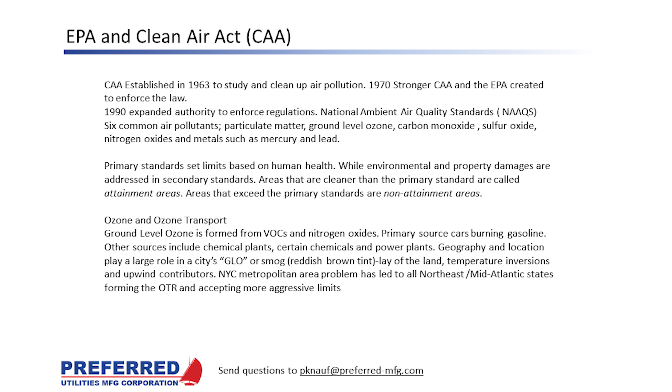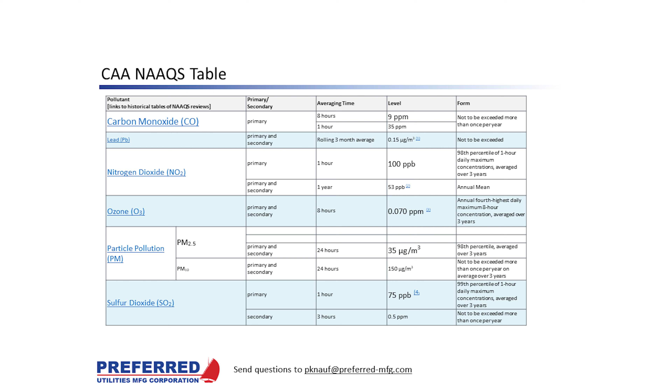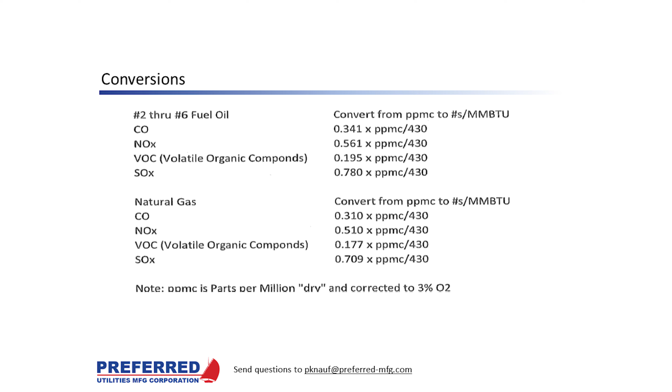If you ever notice a spec or documentation, quite often it's expressed in pounds per million BTU. This is the way you convert from parts per million to pounds per million BTUs for the various fuels, as well as for the pollutants we're going to be talking about today. This is a handy chart to print out and save.

Surveys show that the public perception is we are emitting more today and air is getting much worse. Despite this overwhelming perception, the U.S. is doing quite well, and actually the developing nations are contributing to most of the world's pollution.

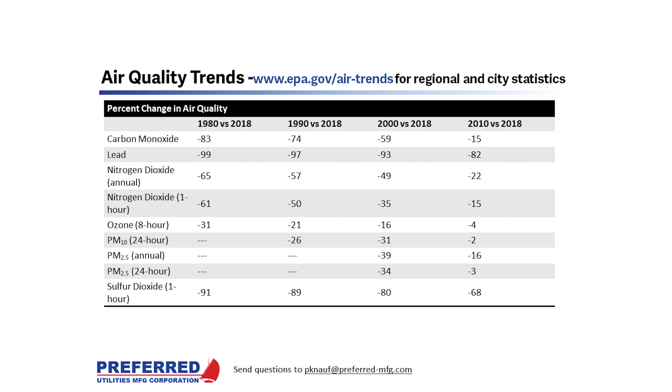As you can see in this table, the EPA is tracking air quality from 1980 to 2018. Carbon monoxide emissions have gone down by 83% in those 38 years. Lead is down by 99%, primarily through taking lead out of car fuel, gasoline. Nitrogen dioxide is down by 65%. Ozone is down by 31%. They didn't collect particulate matter data back then, not until 2000. And sulfur dioxide emissions are down by 91%.

Here's another way to look at it, a nice, easier to look at graph, where the center line of the x-axis is the most recent national standard. As you can see, all the various pollutants are tracking down, and most of them are considerably below the national standard.

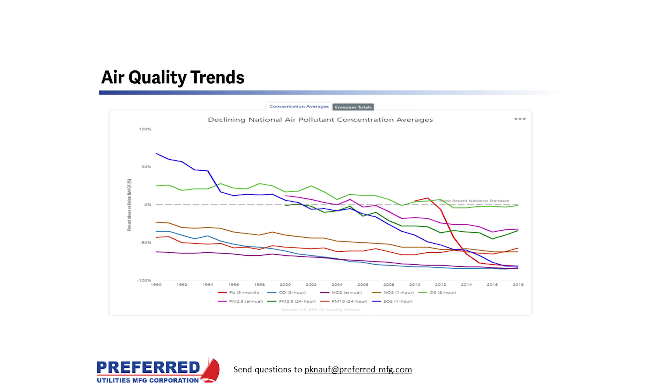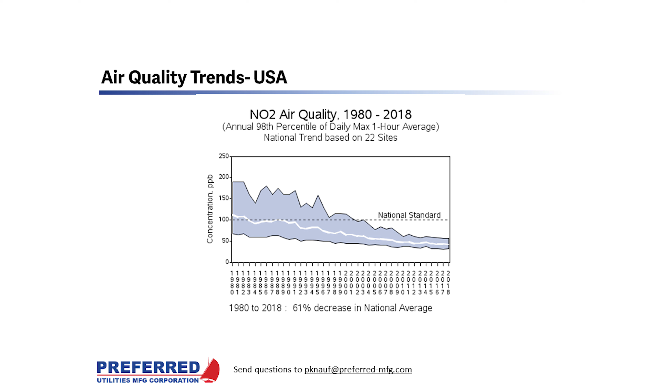The U.S. NO2 air quality from 1980 to 2018 - as you can see, we're above what is now the national standard of 100 early on, but about the early 2000s we dropped below that standard, and today we're quite a bit below that. That's measured as daily max 1 hour averages.

Since most of us are in the Northeast, this is a graph showing the Northeast emissions from 2000 to 2018, the same daily max 1 hour average. So that's a 34% decrease in the regional average.

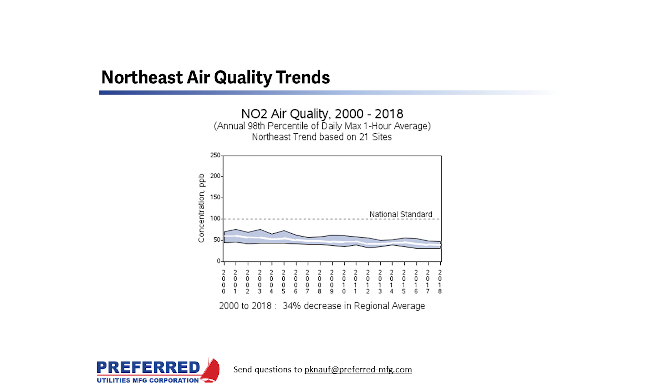There are three main ways to reduce emissions: pre-combustion choices, combustion methods, and post-combustion methods. We're going to discuss those separately.

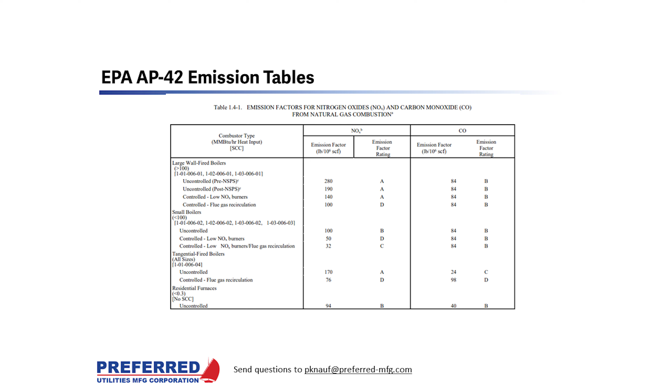Now, most of these statistics you're going to see are going to be corrected to 3% oxygen. So it's very important that you do that, since not very many installations are right at 3%. When you look at the raw data, you must always correct it to 3% oxygen.

David, is that wet or dry oxygen? It really doesn't matter - if you're measuring NOx wet, you would use your wet O2. If you're measuring NOx dry, you would use your dry O2. As long as you're consistent, the formula works.

It is important to note that combustion has pass-through components. Pollution from sulfur, lead, mercury, and particulate matter are not influenced by combustion technology - they're in the fuel and pass through the combustion process.

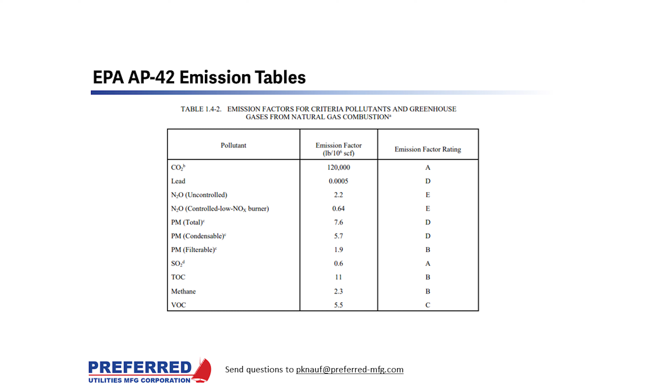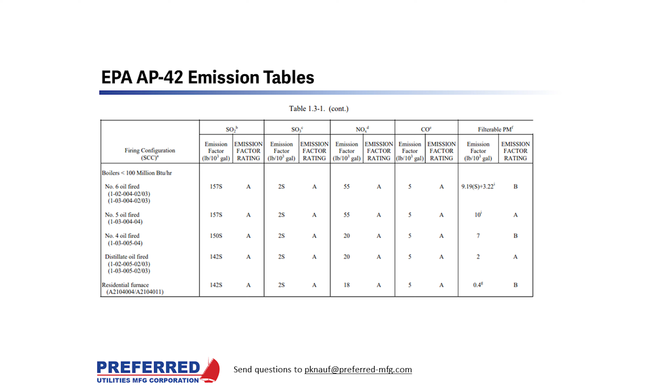Table 1.3.1 shows various fuel oil emissions, expected emissions for SOx, NOx, and CO for different size types of fuel oils. It's important to see the differences from residential furnace emissions, as well as the previous slide's natural gas emissions. So far, we've discussed pre-combustion techniques to reduce emissions, mainly fuel selection.

Next we'll talk about operational changes, but I want to take this time to point out the EPA website and the wealth of information available there. Earlier you saw air trends that came right off the EPA website, and recently we saw statistics on fuel characteristics. All this and more is available at epa.gov.

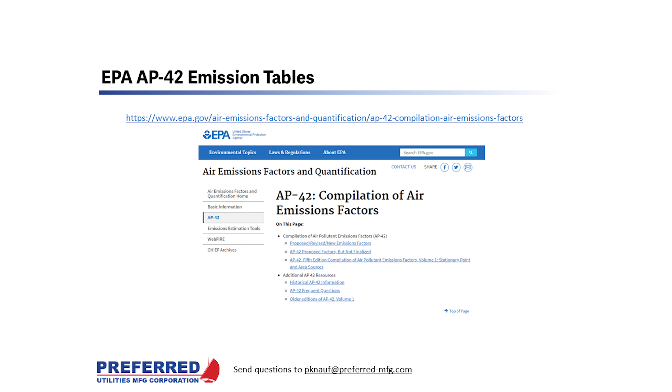So next we're going to start talking about operational changes to reduce emissions. Obviously things like good boiler tuning and lean excess air can improve performance and efficiency in any operation. But mainly we'll be discussing the reduction of pollutants that are not pass-through pollutants, by optimizing combustion and efficiency through improving the combustion process.

Focusing on NOx emissions: NOx is usually 97% nitric oxide and 3% nitrogen dioxide, but it is formed in three distinct ways — fuel NOx, thermal NOx, and prompt NOx. Fuel NOx is oxidation of the nitrogen molecules attached to the hydrocarbon chains inside the fuel. Thermal NOx is NOx formed by dissociating nitrogen molecules in the air that join with the oxygen in the air to form nitric oxide.

So two distinct different areas and sources for the nitrogen. And finally, prompt NOx, which is formed from the rapid reaction of atmospheric nitrogen with hydrocarbon radicals.

Now I wanted to insert here where we've seen pollutants characterized in a few different engineering units. When you see pollutants characterized as parts per million, it's important to correct for the oxygen level in the stack, because it influences the statistics. You take the formula shown here: actual NOx times (20.9 minus 3) divided by (20.9 minus your actual measured oxygen). This works for CO as well as any of the other stack pollutants.

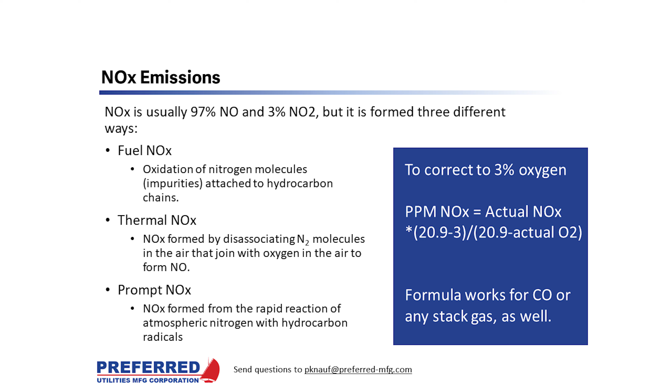Fuel NOx reduction addresses oxidation of the fuel-bound nitrogen molecules attached to the hydrocarbon chains. For single burner boilers, the only way to do it is by burning cleaner fuels. Multiple burner boilers, larger boilers, can use fuel staging techniques to reduce NOx. The strategy is to convert the hydrocarbon fuel to carbon monoxide in a sub-stoichiometric or fuel-rich environment, then convert the CO to CO2 and water vapor in a high excess air environment.

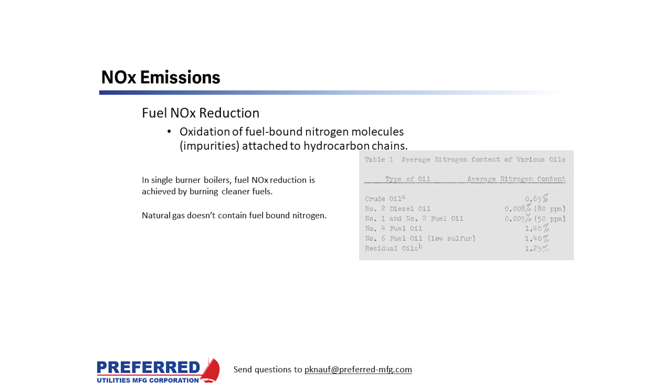This can be done in utility boilers through burner tuning, over-fire air ports, and putting some burners out of service. Obviously these methods are not available in a single burner boiler or furnace, and the only way to achieve that is by changing the fuel.

Thermal NOx reduction: the dissociation of nitrogen molecules in combustion air follows an Arrhenius relationship, meaning the percentage of nitrogen molecules broken into nitrogen ions has a logarithmic relationship to temperature. So to reduce thermal NOx, combustion engineers reduce the peak temperature of the flame.

This is done with burner fuel and air staging to slow combustion, and flue gas recirculation that spreads the enthalpy of combustion over a higher mass flow and lowers the oxygen content at the flame, so more nitrogen radicals reform with other nitrogen radicals to make diatomic nitrogen again. Reducing the concentration of oxygen in the combustion zone, increasing the concentration of nitrogen, reducing the peak combustion temperature, and reducing the time the combustion gases remain at elevated temperature will all reduce thermal NOx formation.

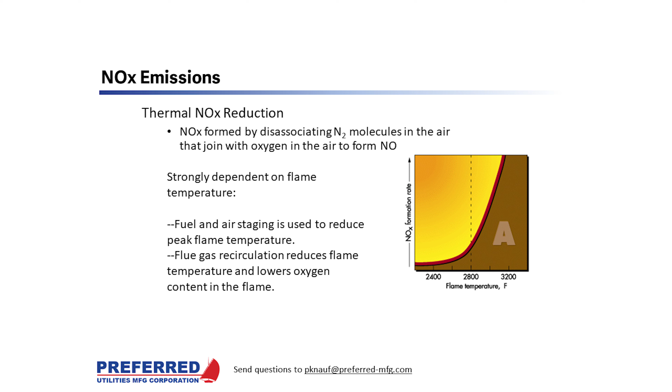FIR is a NOx reduction technique applicable to boilers that burn gaseous fuels only. It's similar to FGR, except that a portion of the flue gas is mixed with the fuel instead of the combustion air. This technique has several advantages: it lowers the peak flame temperature, reduces the oxygen concentration in the combustion zone, improves the fuel-air mixing, and reduces the time under NOx formation conditions.

When the same volume of flue gas is used, FIR can be more effective at reducing NOx than FGR. To minimize possible confusion, caution should be exercised when the acronym FIR is encountered, because it's used to represent both fuel-induced recirculation and forced internal recirculation.

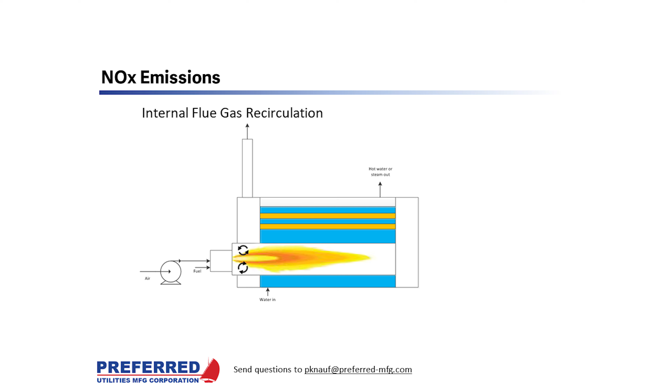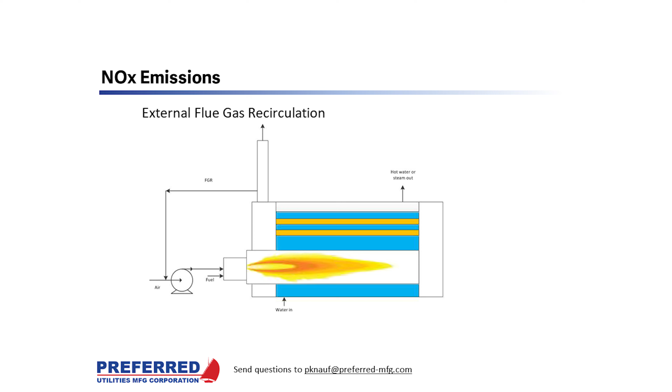This schematic shows external flue gas recirculation, which accomplishes the same thing by reducing the combustion temperature. It's the external feeding of flue gas from the stack or the last pass of the boiler back into the combustion air, where it mixes in the fan or wind box and is reintroduced into the furnace. It's very effective against thermal NOx formation, but this technology is a little older, going back to the 1980s.

Prompt NOx: the most effective NOx emission control strategy is one in which NOx formation is reduced as much as possible while boiler performance is affected as little as possible, except in advanced burner concepts where air and fuel are premixed. Combustion at either low or very high excess air levels results in low NOx formation. For most low NOx boilers, the best combination of low NOx formation and high boiler efficiency occurs when the amount of oxygen is just enough to ensure complete combustion.

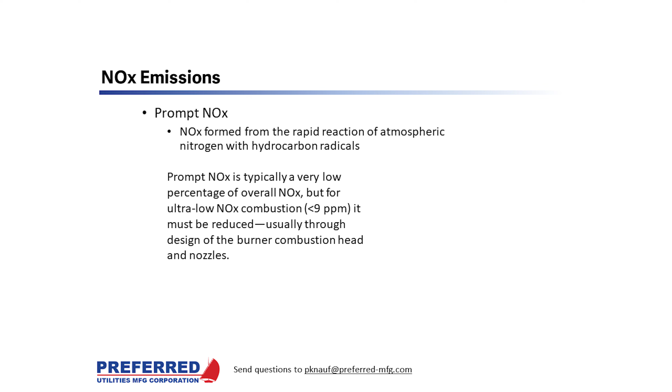Operation at very low excess air levels can cause problems. It can result in incomplete combustion and the formation of CO that causes boiler efficiency to decrease. In addition, it can create unsafe conditions inside the boiler that can lead to an explosion.

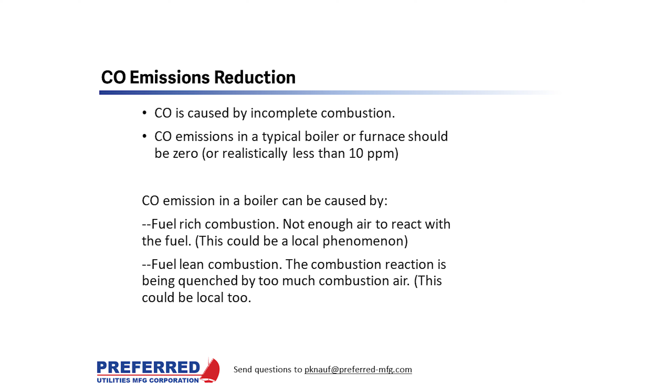CO emissions reduction: CO is caused by incomplete combustion. CO emissions in a typical boiler or furnace are realistically always less than 10 parts per million. CO emissions are caused by fuel-rich combustion, not enough air to mix with the fuel, and too lean a combustion where there's too much combustion air. It can also be caused by flame impingement on the tubes, the furnace wall, or cool refractory. The flame could be too small, so it's not getting above the critical 1400 degrees Fahrenheit. It is much more common to have CO emissions at low fire than at high fire.

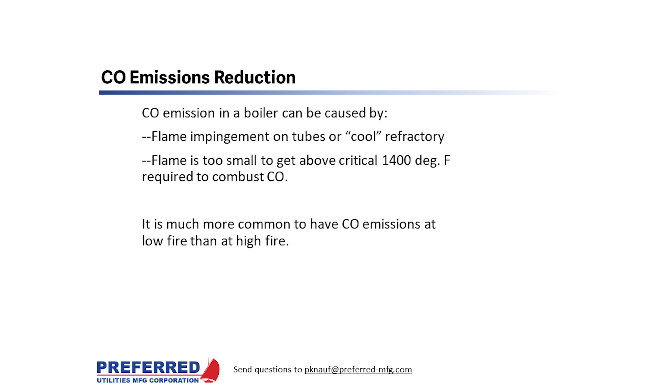So, in summary, we've got NOx abatement methods. Fuel NOx: use a cleaner fuel. Thermal NOx: reduce your peak flame temperature. And prompt NOx: improve mixing and eliminate rich zones. And post-combustion treatment, which we're not going to discuss today, but it's also available on the EPA website - SCR, catalyst beds, and chemical injections. That area is really developing quite rapidly in the last few years.

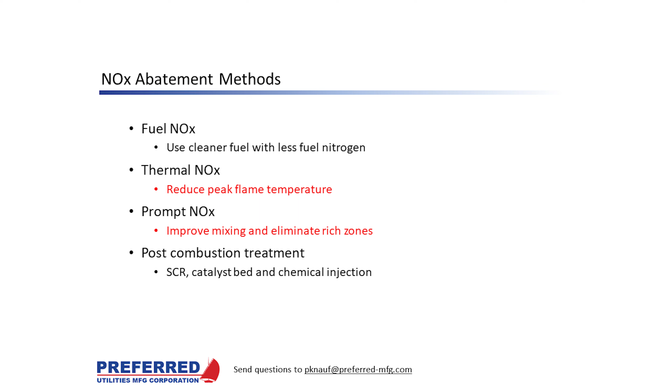Okay, so I'm Dave Oaf. I'm the sales manager at Preferred Utilities. I have been a burner combustion engineer since the early 1990s, and I actually worked in Southern California where low NOx technology really started with Rule 1146, which mandated that if your boiler didn't have a low NOx burner on it, you had to trash it and install a low NOx burner. So we were very busy retrofitting boilers to low NOx burners in the early 90s.

And as those slides from Peter show, we've done a very effective job at reducing NOx emissions in the United States. So much so that when fossil fuel people like Peter and I talk about emissions, we assume we're talking about NOx, CO, and SO2. It seems like anybody under 30 doesn't know what air pollution really is in the United States. So when you talk to them about emissions, they immediately start thinking about CO2.

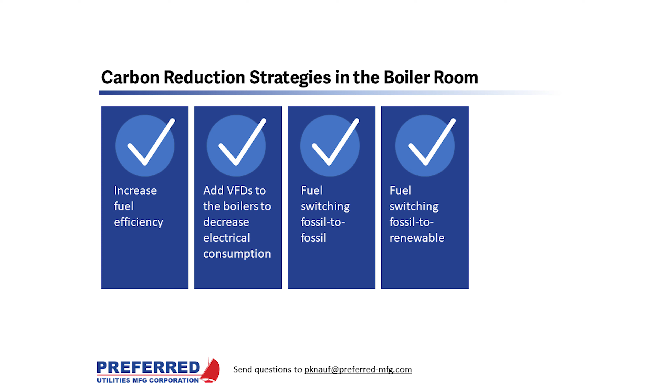And CO2 is what we're going to talk about now, and how you can reduce CO2 emissions in the boiler. So we're going to start small and end big, beginning with fuel efficiency improvements you can make in the boiler room. So it stands to reason that if you burn less fuel, you're going to release less carbon.

And we've been using various technologies over the last 30 or 40 years, as fuel prices have increased, to increase the efficiency of burners for the economic payback. But by decreasing the amount of fuel you burn, you also decrease the amount of CO2.

So what you can do is retrofit to a high performance burner that will lower excess air, increase burner turndown, and if you employ a control system known as oxygen trim, you can lower your real world operating excess air even further. So efficiency gains of 5 to 8% of fuel consumption are possible, and that corresponds to 5 to 8% carbon emission reduction.

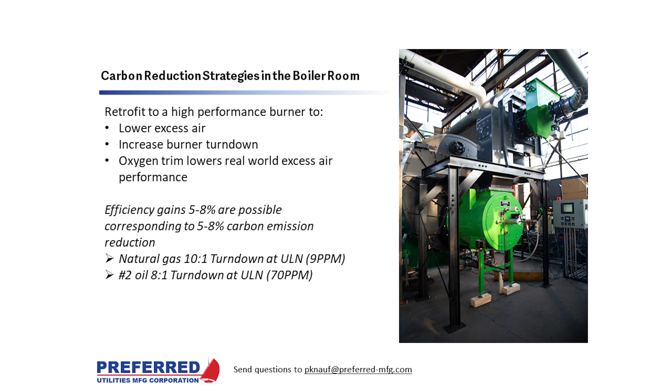Another thing you can do is reduce the amount of electricity you're consuming in your boiler room. We do this by replacing across-the-line motor starters with variable speed drives. And usually we will start with the biggest blowers or the biggest motors in the boiler room, and that's usually the forced draft fans on the burners.

We might put VFDs on the induced draft fans, and sometimes we'll put VFDs on the feed water pumps. But typically we start at the largest motor because that's where the ROI is the most, and that's the FD fan. And the conversion between electricity and CO2 depends on where you are.

And the way to calculate this is to go to the EPA's website. They have a calculator there called AVERT, which is an acronym for something or other. The national average is you release 7.07 times 10 to the negative fourth tons of CO2 per kilowatt hour reduced. That number varies from place to place depending upon how much fossil fuel is used to create electricity where you live.

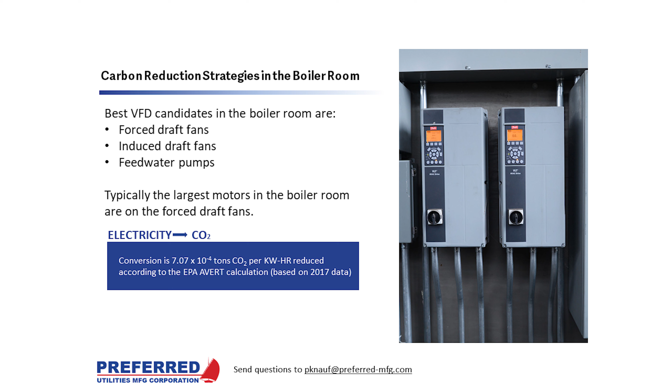We run the fan at 60 hertz and throttle it back with a damper. When we put a variable speed drive on the FD fan, we'll use a little bit of damper control at low fire, but the goal is to get that damper open as quickly as possible as you move up to the higher firing rates. Once the damper is full open, then we start increasing the VFD speed.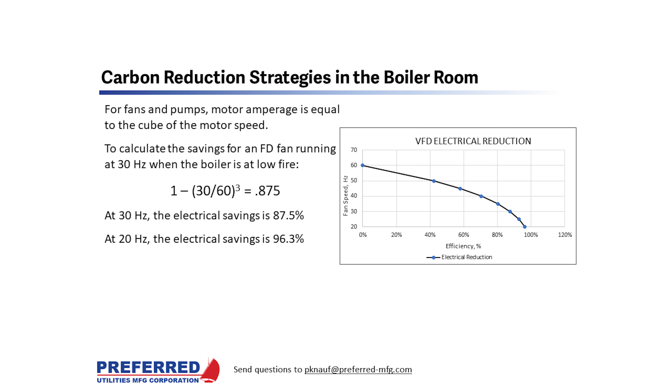And the conversion, just as a reminder, is 7.07 times 10 to the negative fourth tons of CO2 per kilowatt hour reduced. To estimate the fuel and electricity efficiency gains possible with a burner and controls retrofit, you can use

Preferred's online energy saver payback tool. You input the excess air, stack temperature, and load profile of your existing burner, as well as the performance of the proposed new burner, and the web app estimates your fuel, electricity, and carbon savings.

You can input your fuel, electricity, and retrofit costs, and the web app will output an ROI for the upgrade. The web app doesn't calculate CO2 savings from the electricity reduction yet, but it's on our list of things for our programmers to do. For now, you can use the AVERT calculation for your region.

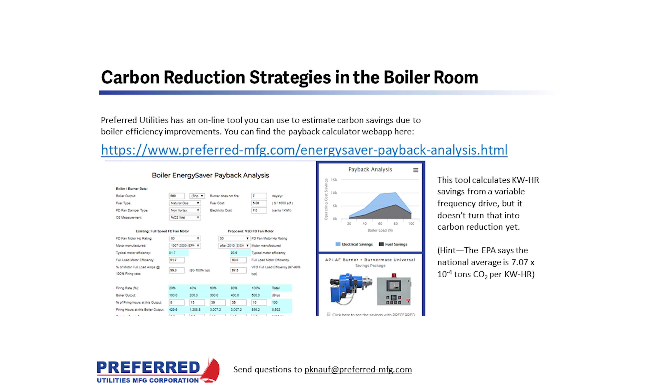So the second strategy you can use to reduce your CO2 emissions is to switch from one fossil fuel to another, switching from a very carbon-intensive fossil fuel to a less carbon-intensive fossil fuel.

This chart shows the pounds of CO2 you produce per million BTU of different fuels. Natural gas is the lowest, and different types of coal are the highest.

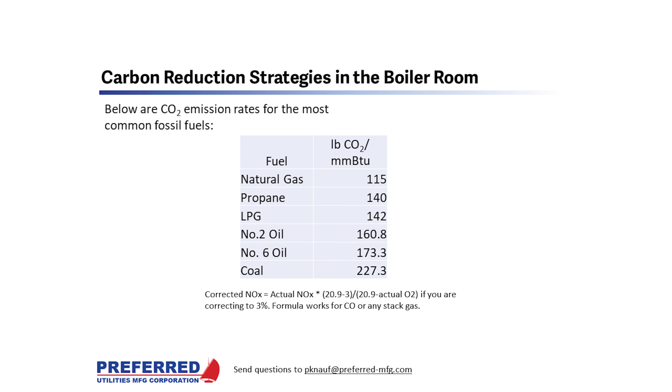So I made this chart to show you the percent reduction in carbon switching from one fuel to another. You start in the first column. If you're switching from number 2 oil and going to natural gas, your carbon emissions reduction will be about 28%. This is just based upon the stoichiometry of burning the different fuels. If you remember your high school chemistry well enough, you can write out the stoichiometry equations and check me.

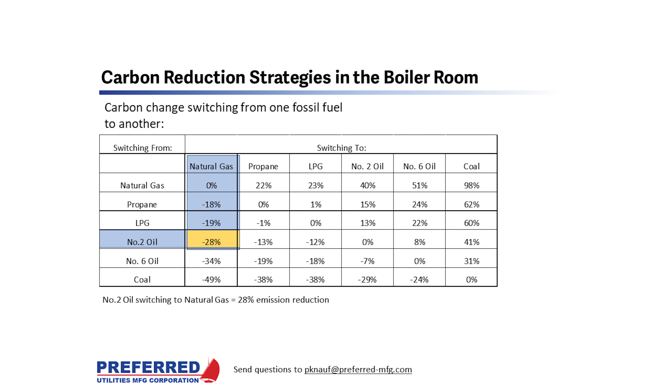All central steam plant boilers can be converted to natural gas firing, including field-erected water tube boilers, packaged water tube boilers, and packaged fire tube boilers. In most cases, new burners and controls will be required.

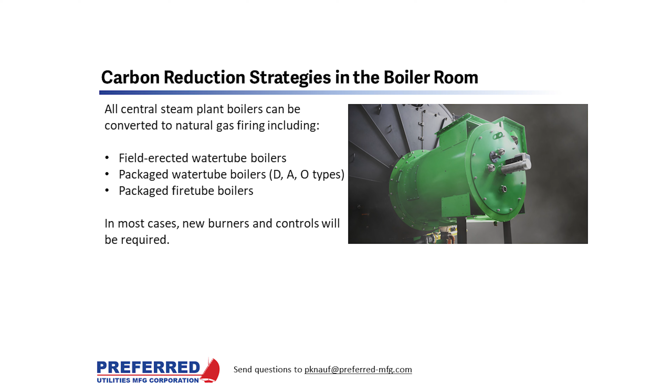Burner retrofits require expertise in combustion and boiler controls for best results. In most cases, the burner will have to be replaced. Sometimes a new burner insert can be made to fit into the existing windbox.

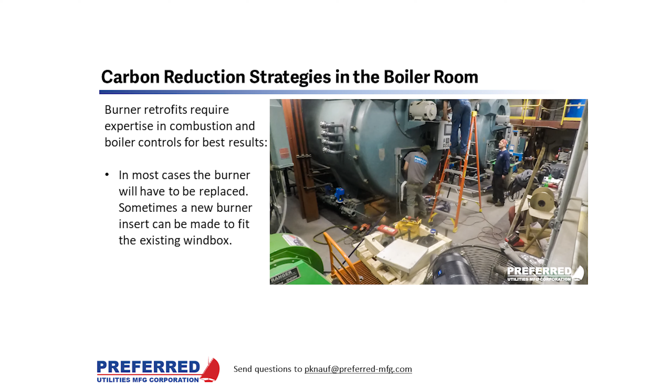This video shows a crew replacing the burner in a trademarked Cleaver Brooks boiler with a new Preferred burner. As you can see, with guys working really fast, this was done in 41 seconds.

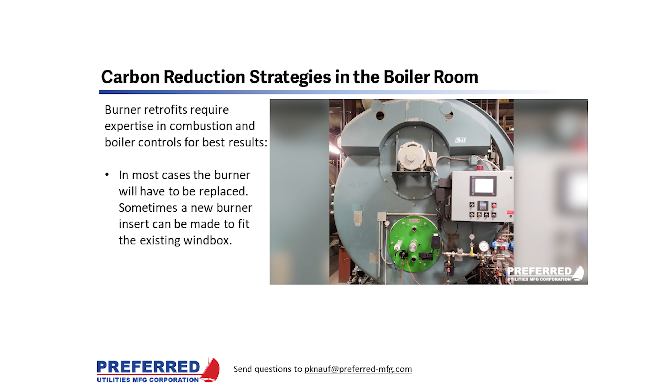This was a fuel switching project at Bates College where they switched to a renewable fuel and achieved an 82% carbon emissions reduction. But I'm skipping ahead.

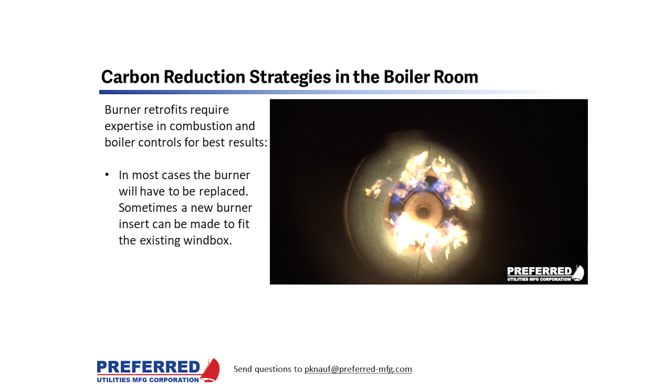When you're doing a burner retrofit, it's important to include a vendor knowledgeable in both burners and controls that will walk the boiler room with a representative from the plant and make a replace or reuse decision for each of the following components: the windbox burner fan assembly, the flame safeguard fuel air ratio controls, instrumentation including pressure and flow transmitters, motor starters, and VFDs. Why spend money replacing perfectly good equipment if it will work with the new burner?

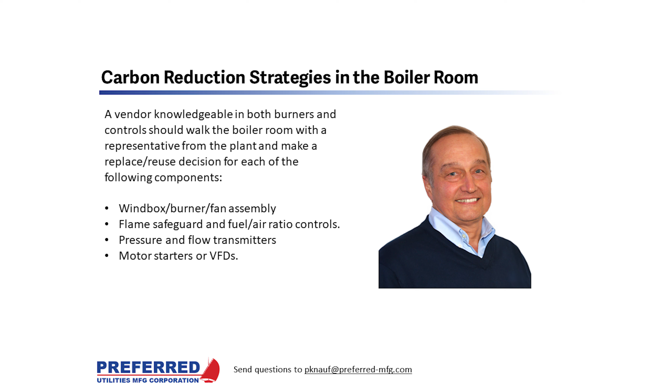So the final carbon reduction strategy we're going to talk about is converting from a fossil fuel to a renewable fuel. The idea with renewable fuels is we are taking carbon that was already in the biosphere and burning it. We're not taking carbon that was 8,000 feet under the ground in the form of fossil fuels and putting that into the atmosphere.

So when we talk about landfill gas or digester gas, or some of the liquid fuels that are going to come up in a few slides, this is carbon that was recently trapped, and we're putting it back into the atmosphere. We're not taking long cycle carbon from the dinosaur period and putting it into the air.

So everybody in the boiler burner industry is familiar with landfill gas and digester gas. Both are renewable fuels made from renewable sources. We've been burning these fuels since at least the 1980s. The problem is they're gaseous fuels that can't be economically transported any distance.

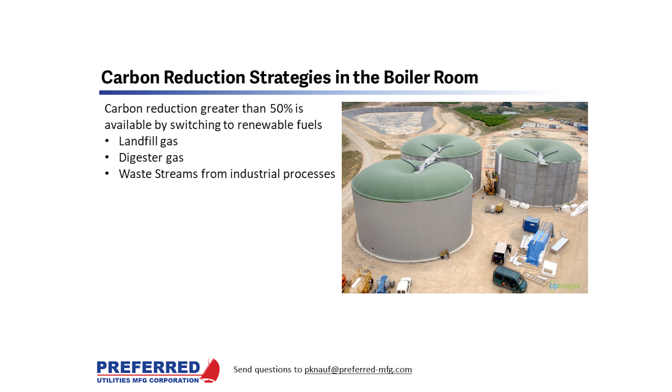And even if you had the real estate to put in a lagoon or digester gas in the middle of your campus, you're not going to want to do it because of the smell. Preferred works with two suppliers of liquid fuels.

Ensyn manufactures a fuel called Renewable Fuel Oil, or RFO, and REG manufactures a fuel called biodiesel residual oil. Both of these fuels are liquids, so they can be put on a truck or a rail car and delivered directly to your facility from where they're made. This unphotoshopped picture is proof.

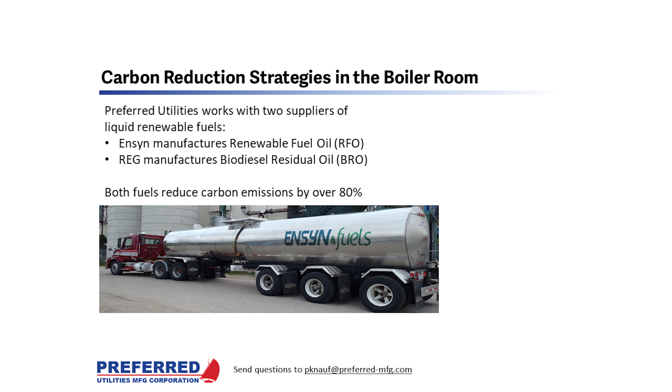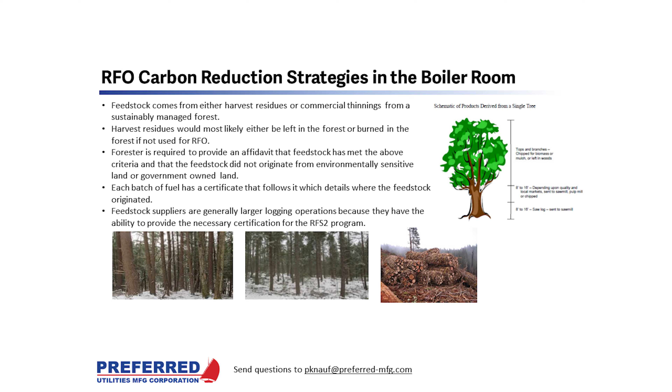Ensyn makes renewable fuel oil, or RFO for short. It's made from tree trimmings from harvest residues or commercial tree plantation thinnings. If this biomass wasn't made into RFO, it would be burned or left to decompose, and the CO2 would have hit the atmosphere soon anyway. RFO has been approved for all regulatory credits for renewable fuel oils, including RINs and RECs.

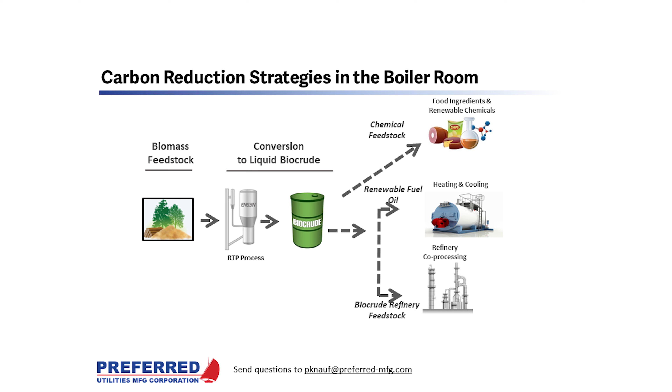This is a very simple diagram explaining where RFO comes from. The end products are liquid smoke, renewable feedstock sold to petroleum refineries, and RFO for steam and hot water plants. By the way, when you burn RFO in your boiler, it produces a very nice wood smoke aroma.

RFO is considered to be biogenic. So greenhouse gas emissions from RFO are about 88% lower than number 2 oil and 82% lower than natural gas. Virtually any fire tube or water tube boiler can be converted to fire RFO. RFO is acidic, so everything in contact must be made out of stainless steel.

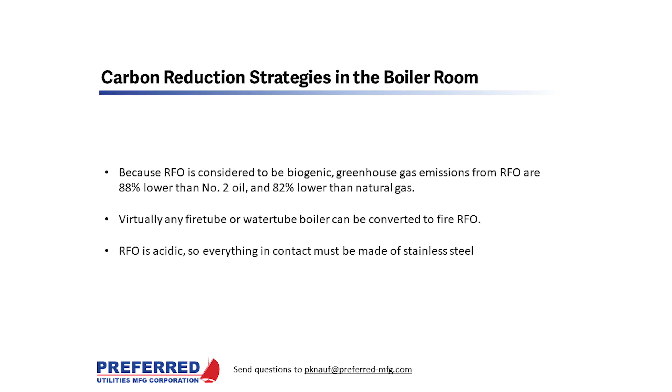The greenhouse gas emissions reductions for this fuel, it's not 100% because it does take some fossil fuel to make the renewable fuel and to transport it to the plant where it's going to be burned. Ensyn, the manufacturer of RFO, typically amortizes the cost of the fuel conversion in a 5-year fuel contract. Even with the fuel switching costs, the price of RFO is close to the price of natural gas on a comparable BTU basis.

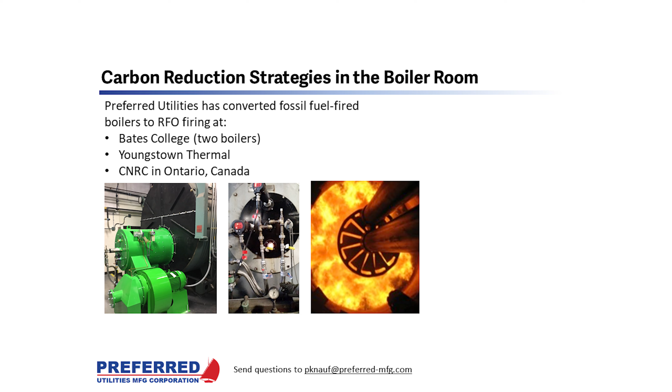Preferred has converted boilers at 3 facilities to RFO: Bates College, Youngstown Thermal, and a CNRC facility in Ontario, Canada. So the video I showed you earlier was Bates College. They've converted 2 of their central steam plant boilers to RFO.

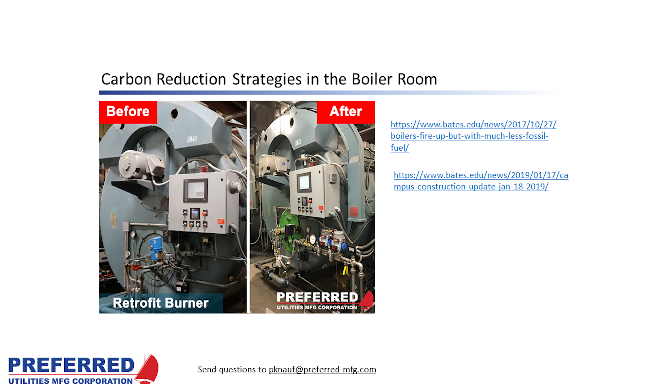As soon as our technicians finish tuning up the new burners, Bates issues a press release touting their success reducing greenhouse gas emissions at their campus. The URLs are there, or you can Google the words Bates and renewable and you'll find these articles. Actually, last summer, Bates announced that they are greenhouse gas or carbon neutral, mainly because of efficiency improvements to the campus and converting their central steam plant over to RFO.

Preferred is also working with REG, the nation's largest supplier of biodiesel. They make a fuel called biodiesel residual oil. Think of bioresidual oil as the number 6 oil of biodiesel. It has the appearance of dirty French fry oil, but it has actually undergone extensive cleaning to remove impurities such as ash, heavy metals, and water.

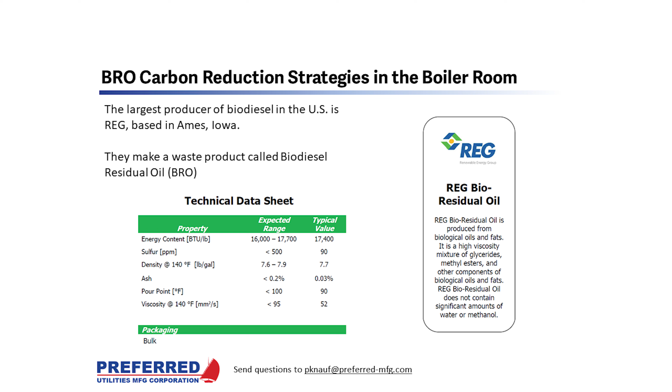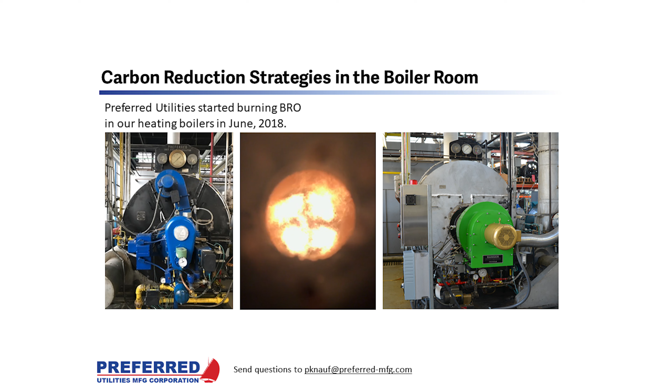Preferred started burning bioresidual oil in our two shop boilers in June 2 years ago. The burner on the left is a 1950s vintage Preferred rotary cup burner designed to fire number 6 oil. The burner on the right is our state-of-the-art low-emissions Ranger burner. They are both burning bioresidual oil.

This is the startup data from one of the two boilers. Important things to note include bioresidual oil needs to be heated to 160 to 165 degrees F. If the existing burners that you're trying to burn bioresidual oil in are using number 6 or number 4 oil already, they will have a pump and heater set that could be reused.

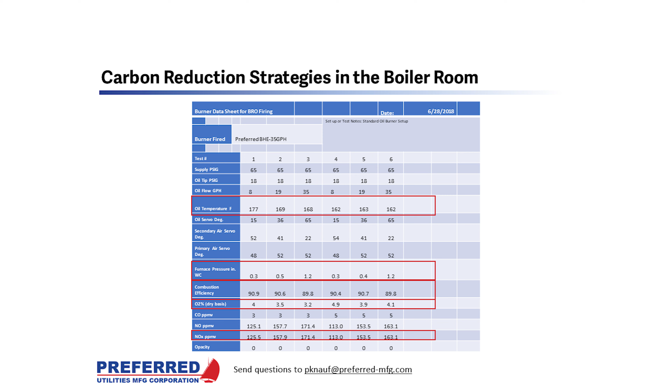Note, the combustion efficiency is similar to number 2 oil. Stack CO is less than 10 parts per million. This is considered clean combustion for any fuel. Opacity was 0 throughout the boiler load. In fact, these burners were firing number 6 oil before we changed them out to bioresidual oil. It took no new equipment, not even a new oil tip, to burn the bioresidual oil.

Preferred's two boilers have been firing bioresidual oil all through the 2018-2019 heating season and the most recent 2019-2020 heating season with no unplanned downtime. We shut down these boilers each summer, we open them up, and we've found no unusual ash or sooting of the boilers. We fired them up again last summer for a show and tell with no issues at all.

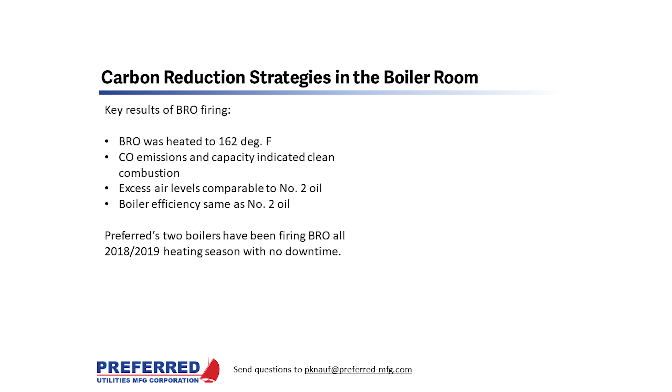The price of bioresidual oil is generally less than number 2 fuel oil. Fuel switching costs vary widely depending on the existing combustion equipment. So the ideal bioresidual oil candidate is a facility that already has a pump and heater set, so already firing number 6 or number 4 oil. They can reduce their greenhouse emissions by up to 80% and spend less for fuel than number 2 oil.

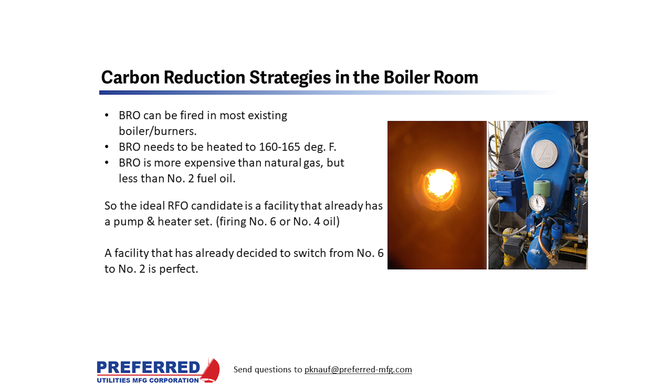There are a lot of facilities in the Northeast that are still burning number 6 and are planning to switch to number 2 in the near future. These plants can switch to RFO or bioresidual oil and exceed all existing and proposed carbon emission reduction goals. So that's my part for reducing carbon emission in your boiler room.